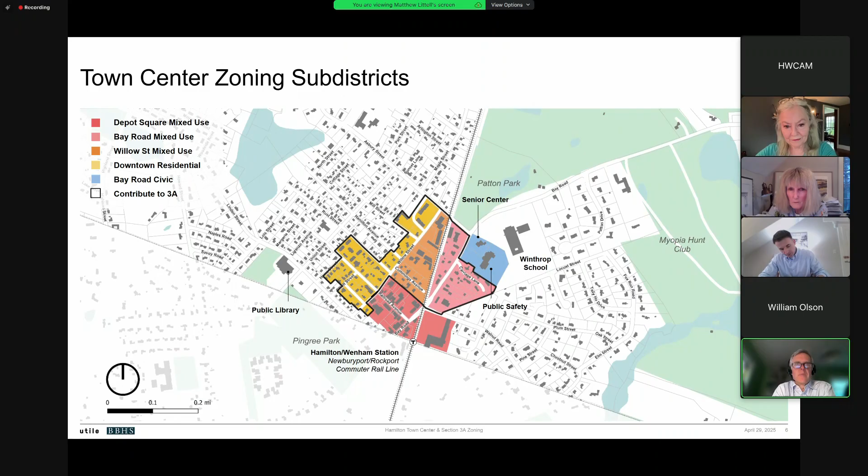And then the second district is an overlay on Asbury Street. It consists of really 2 parcels, one of which already has a 23-unit condominium development. The other, I understand, was recently permitted for, I'm sorry, 46 units through 40B. And so these 2 parcels are mostly either developed or about to be developed, but together they comprise about 19 acres and are probably not likely to be redeveloped.

Just to clarify, that's 45 units, a 40B project, affordable housing project. Yes. That's been previously approved, and our understanding is they anticipate starting construction this year. Okay. So we will correct the data here.

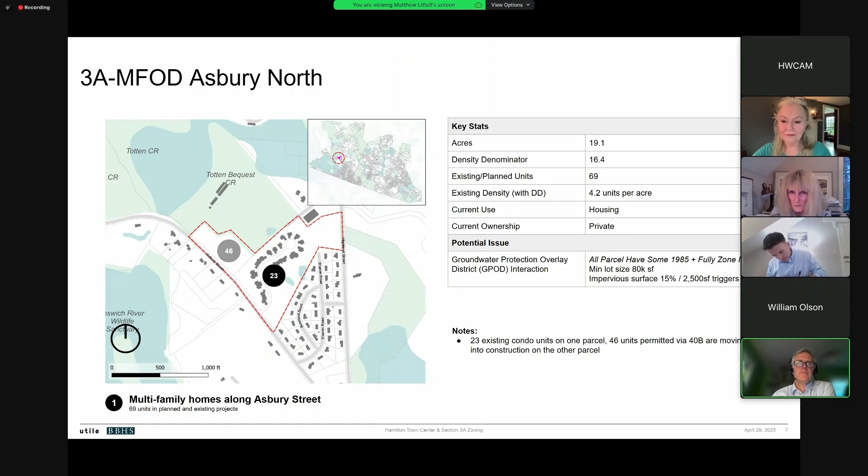Okay, summary of the changes that we made in draft 2. First of all, I want to thank all the members of the planning board that really went through the document in some detail and made very useful comments. We have, in most cases, responded to those or made those recommended changes. There are 3 areas of change. The first is changes to your underlying bylaw, mostly triggered by the addition of these new districts.

We've taken the use table that had previously been separated out into the new town center district. We've put it back where it was and simply added new columns with the new sub-districts and built off of the existing use table, adding a couple of uses in there, mainly multifamily residential.

We, upon a very good recommendation, I think, deleted the Willow Street overlay, which has really been sort of superseded by this zoning. The senior housing provisions now really just apply to the R districts because multifamily housing is now allowed in the town center. The business district, as you currently have it, has been completely replaced by the new district. So we've sort of combed through the document to make sure that that was erased or adjusted accordingly.

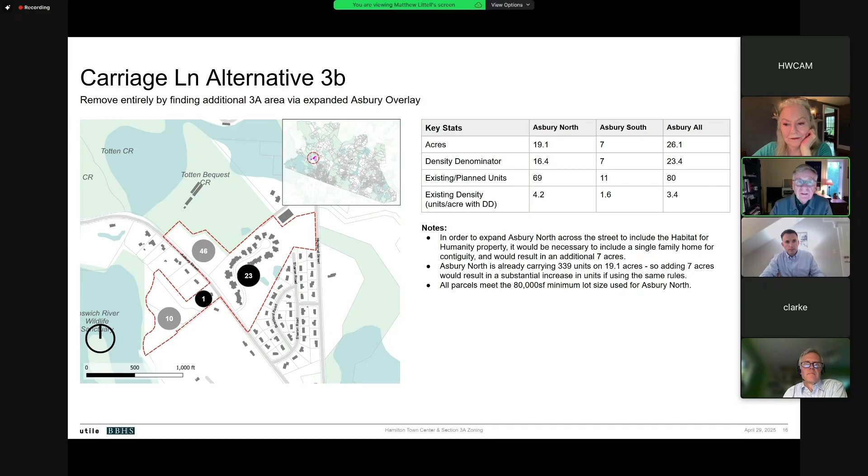Before we open that up, Matt, could I just offer a clarification point that might help folks put this into context, which is maybe you could discuss a little bit what triggers this code. That it isn't anything that suddenly changes the character of the lot. It's when there's redevelopment. Do you want to talk about that a little bit? And it's also one of the suggestions that I had, to clarify in the actual code what triggers this zoning. Could I just add that, Jonathan, that's an excellent point, and it's also one that I believe has to be addressed within the existing code.

Yes, that's what I was indicating. Yes, absolutely. Well, I think it's like any zoning change where existing uses are essentially grandfathered in. There's no sort of immediate non-compliance or obligation to change. Virtually all of this downtown residential neighborhood is out of compliance with your current R1A zoning. And so there isn't really a trigger unless someone wanted to completely redevelop their parcel.

It might also be helpful to give some context to the lots that are being proposed to be included in the zoning district there, that they're half-acre lots. And by applying the math that you have for that district, you'd be allowing a by right development of about a 10,000 square foot building on those half-acre lots. Are you doing the math on the floor area ratio? Yep. That's a big building. It's just to give it context that that's a residential area that's connected to other residential areas, and it would be quite a big difference to develop it that way.

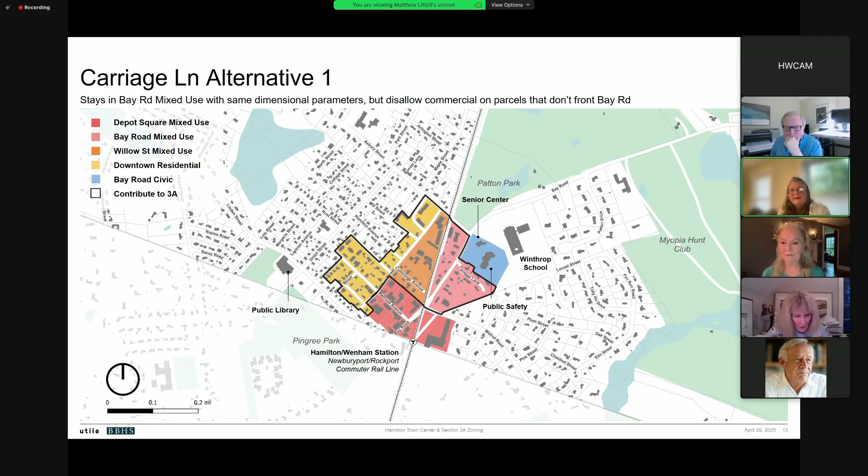But I will add that I think it's appropriate to give those property owners on Carriage Lane specific notice of this proposed zoning. Thank you, Marnie. You're welcome. Matt, do you want to go forward? Sure.

Okay, the other thing we want to talk about, because it was maybe a source of confusion, is the permit threshold between by right and special permit in the Depot Square district. The code and the metrics were built upon some of that nice existing fabric that you see on Railroad Avenue. You know, closely knit, small shops facing the front in a nice sort of walkable district. That became, in a sense, the building block.

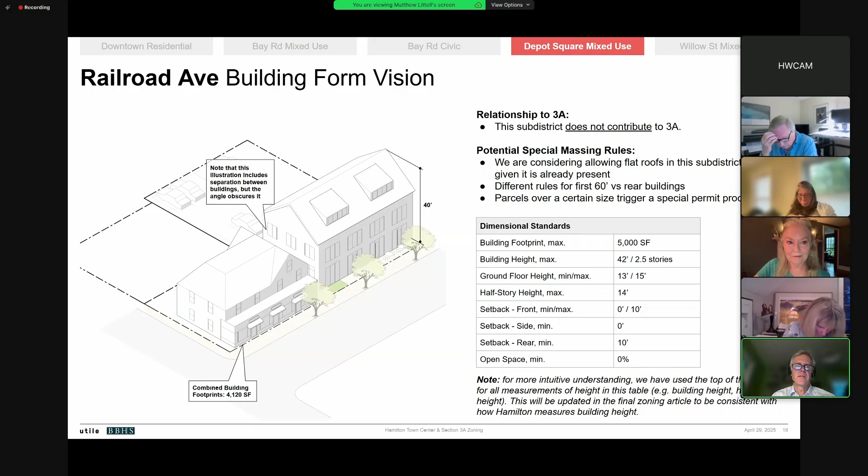And the intention was to build upon that fabric dimensionally in terms of character, and sort of having the zoning allow for that to spread to larger parcels. This is a kind of planning diagram that illustrates some of the planning principles that we discussed as informing the zoning. And so you can see in the large shopping center site, the idea is to, rather than have large parking areas fronting the road, to actually have new appropriately scaled development along the edges to promote a kind of nicer pedestrian friendly sort of shopping experience.

There was an idea to maintain some connectivity, at least visually, through Railroad Ave into the site, and as well as allow for some future potential connection to the greenway in the rail right of way. This is a kind of image of how that might look. You're seeing, again, Railroad Avenue type of density and development along the perimeter, and then allowing for larger shopping center deeper and in the middle of the site, similar to what's there now.

The site is too large to simply put a by right zoning at it. We do need to allow something. And so the way the zoning is written now is that by right development of this scale is permitted for the first sort of 60 feet of the development. And then anything behind the 60 feet of frontage would have to go through a special permit.

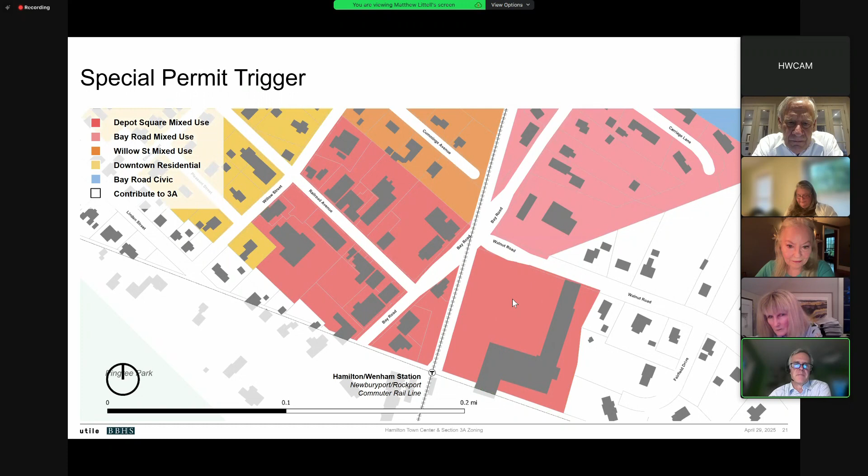Can I make a comment on that, Matthew? Yeah. I did a test run on using your code on the frontage on Walnut, and there seems to be a conflict. You're asking for a 30-foot separation between buildings throughout the whole depot district, and that would also include Railroad. So if you were to reconfigure Railroad in the event there were damage done there, and you try to recreate it, you're still asking for 30 feet per building, which isn't true for a lot of those buildings right there now.

But the other issue, by using that 30 along Walnut, you're also applying another metric for percentage occupation along the frontage. In other words, you take a distance from the corner at Bay to the opposite corner on the east, it's 343 feet. And you got a park in the corner there that's about 100 feet. And they've got two driveways going in that should be probably 35, 40 feet apart. You're not going to reach the 60% that you're looking for in the metrics.

Right. So I'm seeing a little bit of conflict there in terms of how you're using the metrics and putting it all together. I think the 60-foot deep is interesting because of what it forces you to do, given a building size that you're allowing, 5,000 square feet as a footprint. So it kind of forces a particular kind of configuration there. You can build smaller, but builders generally don't like to build smaller. They like to build larger. I'm just wondering if we should kind of reconsider that 30-foot separation.

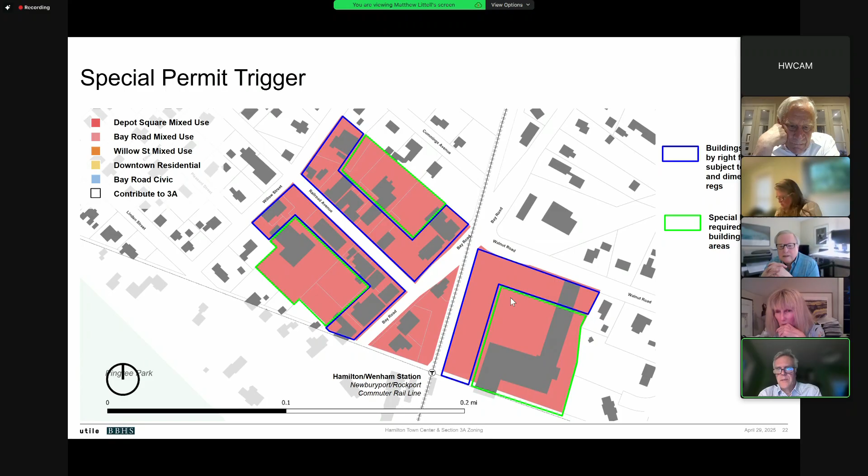Just to bring it up again, I've heard a lot of comments objecting to the building along the rail line, sort of internal in that site. And I don't know, if you keep coming back with it, whether that's really a strong thing to do from your standpoint as a town planner. It goes back to this diagram that we worked on, which is to encourage a certain amount of pedestrian frontage, right? This is a weird situation where we have rail frontage, but not a street. And yet it's completely visible. It's not a back of house rail. It's a rail line that goes right through the middle of town.

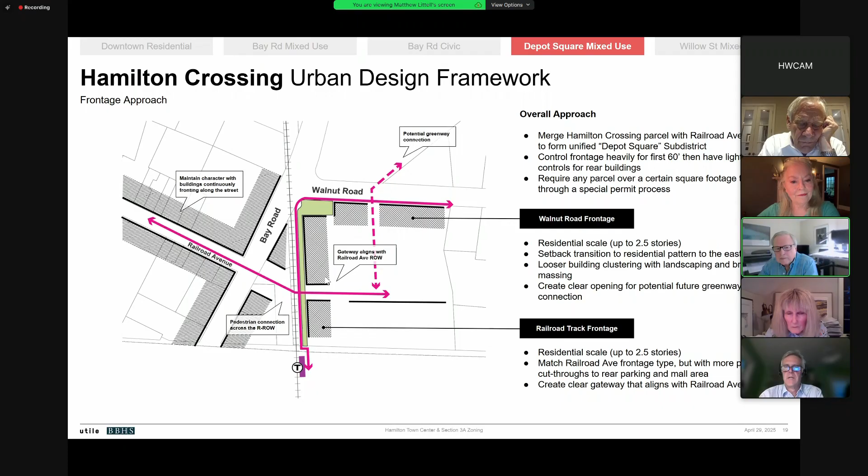And so we saw this as part of a continuous and interesting series of pedestrian accessible frontages, or at least accessible points. You think about the visibility from Railroad Ave, the visibility across this way, and I don't think that these edges want to be backs. And so we've characterized this edge in particular in the code as a frontage and not a side yard. Right. So you have frontages on two sides then, on the parking side and on the rail side.

Yes. So I've been also questioning that, but in your explanation today, Matt, I think you've convinced me otherwise, because I would agree with you that when you're on Bay Road, you do see that area, and right now it's visually confusing, and this would actually organize it and draw people into that development. So I've changed my tune with your words tonight.

I would also like a little bit of help here, because I understand the 60-foot metric. I also think that we might phrase this in the alternative with a reference to the amount of square footage on the site. So requiring a special permit if one of two conditions were to be met. And the other reason it would be important to have a special permit in this area is because if you were to have development along the railroad tracks in this area of the Crosby's Marketplace, you would have to have buildings with two frontages, because you would want access both from the railroad track pedestrian walkway and from the parking lot. So both sides of the buildings would have to be visually attractive.

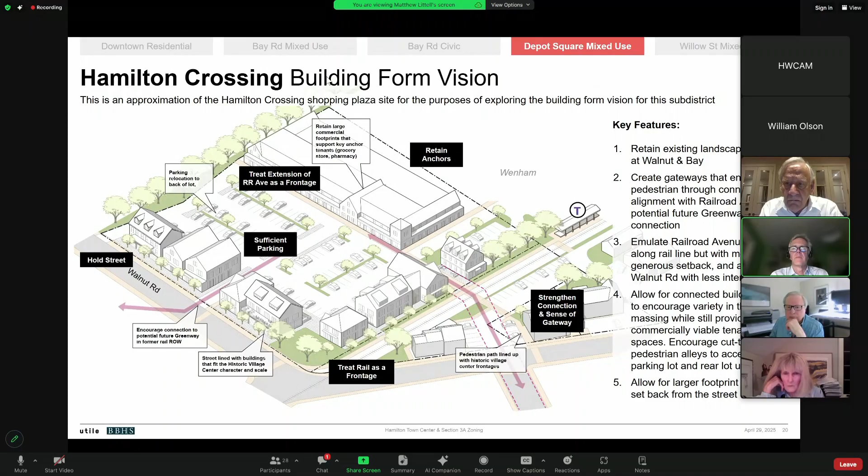Okay, I wanted to just make sure we hit on this. It was recommended that we look at the Wenham language for a sunset clause in the zoning, which essentially is a statement that says that if the 3A law becomes inactive or it's been overturned in part, the zoning bylaw is automatically voided. We've done our best to adapt the language that they have. It would need to be reviewed by counsel, and I don't know what the state's going to think of it.

One important question here is we've included it for the multifamily overlay district on Asbury. And my question is, would you want this to apply to the 3 affected town center districts that are contributing? So downtown residential, Willow Street, and Bay Road. What happens if this is underlying zoning and it's rescinded? Don't you need some fallback zoning or something? That's one part of the reason that we didn't include it. That's exactly the point.